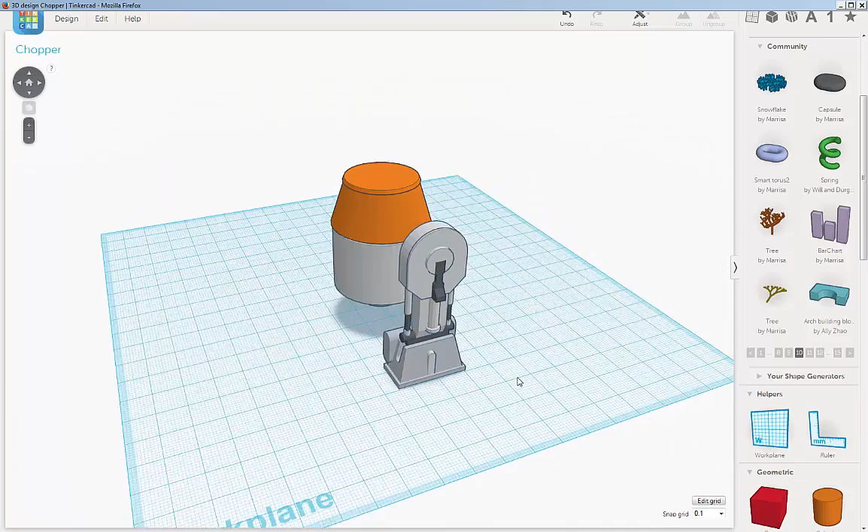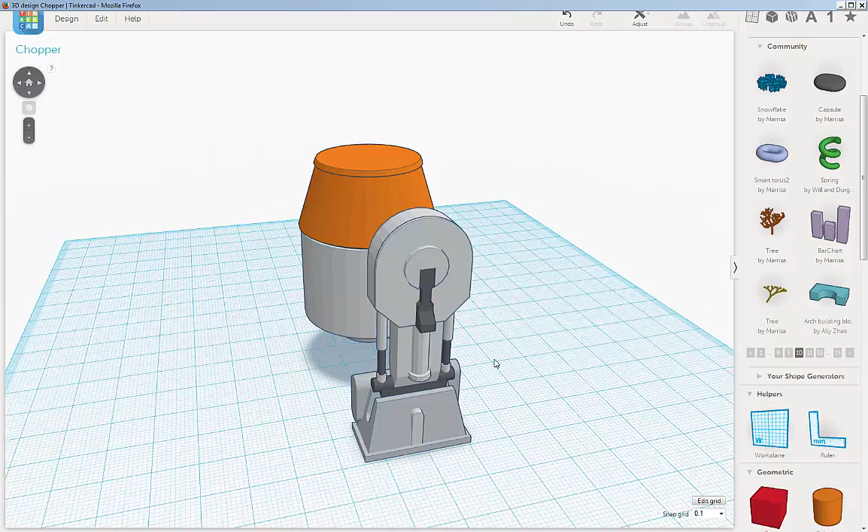Alright, so we're now going to move on to Chopper's left leg. It's pretty much the same, but the biggest difference is this part here. It's dark green and has a different shape. There are a few added detail bits that are a little different too, but we'll save ourselves a lot of time by copying and mirroring this over.

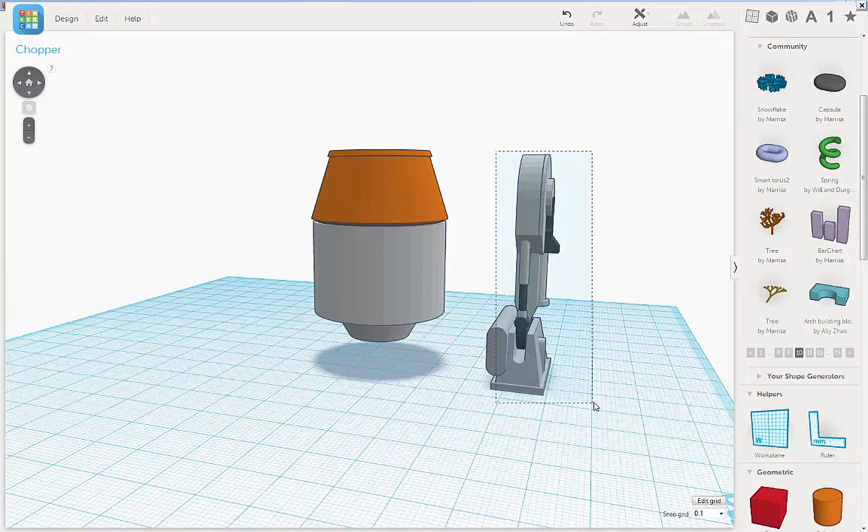So let's get started. I'm going to select this, marquee select, and group it for now. In order to keep the colors the way I like, I'll go under color and select multicolor.

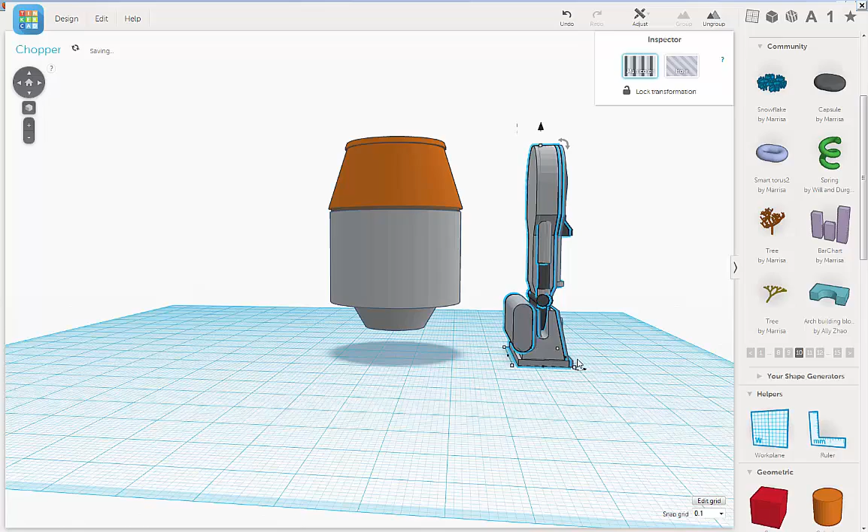Then I'm going to duplicate this under edit, duplicate, and now use the left arrow key to slide this over, which is taking way too long, so I'll use the shift button instead. Click off, push shift, then the left mouse button, then slide it over.

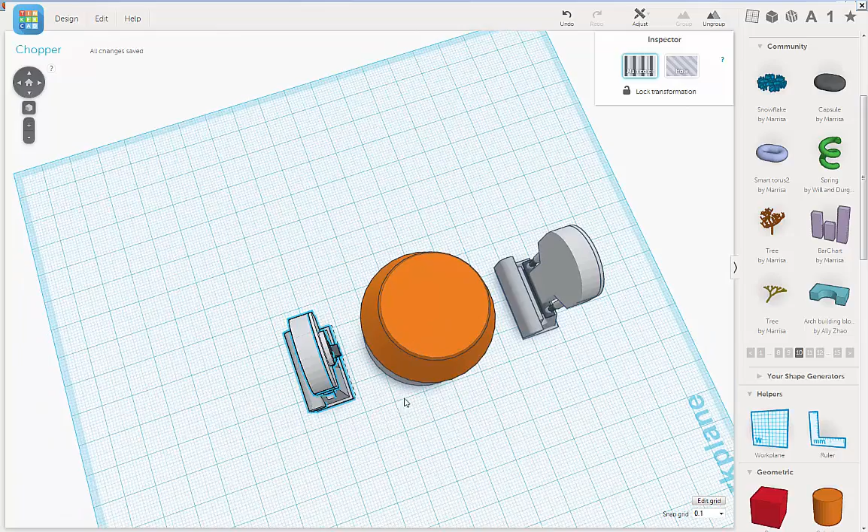Then I'm going to rotate it 180 degrees. It's getting close.

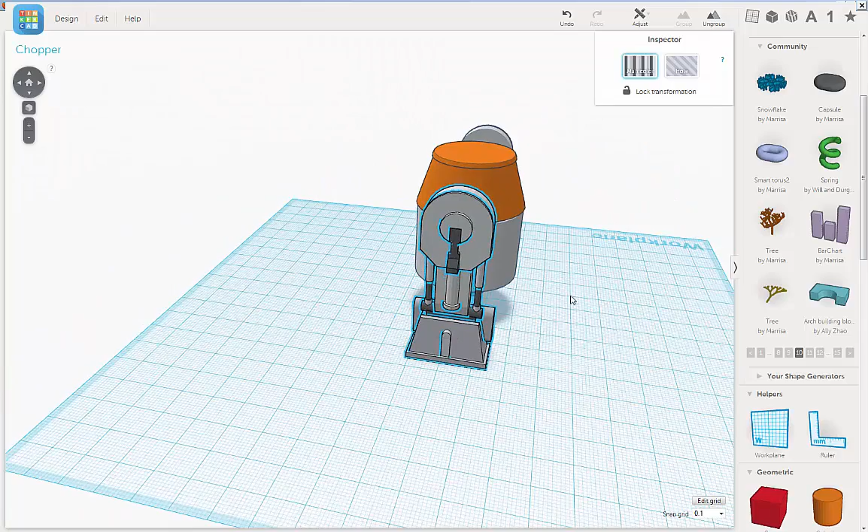So now, in order to make this left side, I'm going to do a little trick. I have this selected, and I'm going to ungroup that.

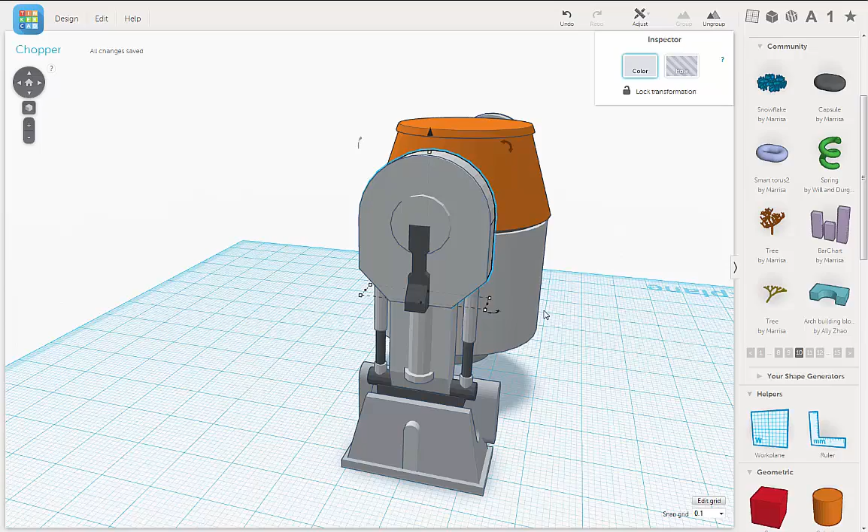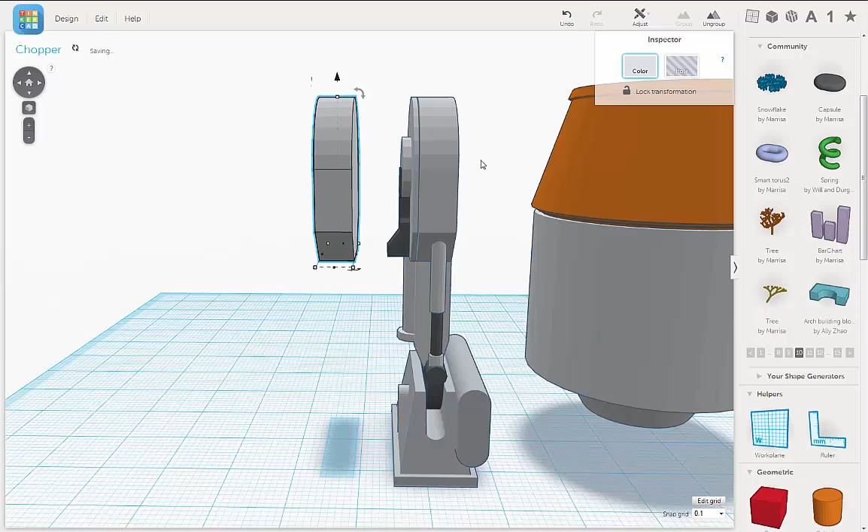I'm going to select this piece up here, and duplicate that. Edit, duplicate. In order to keep things aligned, I think I'm going to move it out and forward.

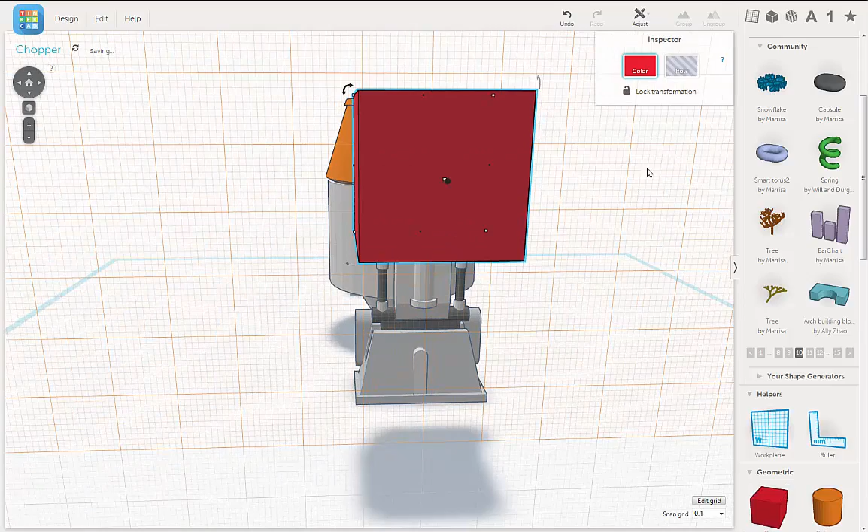Now I'm going to take the work plane, put it onto this face, and drag a cube out.

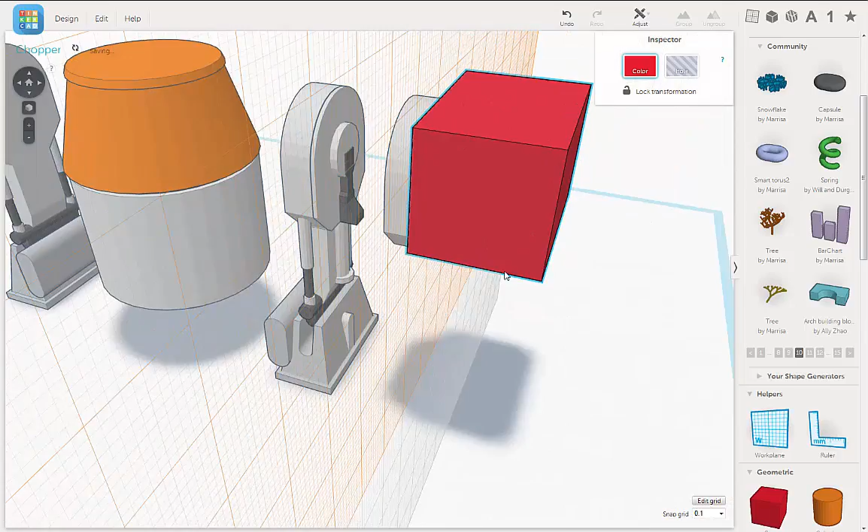I'm going to stretch it out. So grab this center point, drag it out, take the bottom point here, drag that out. Don't need it to be that thick.

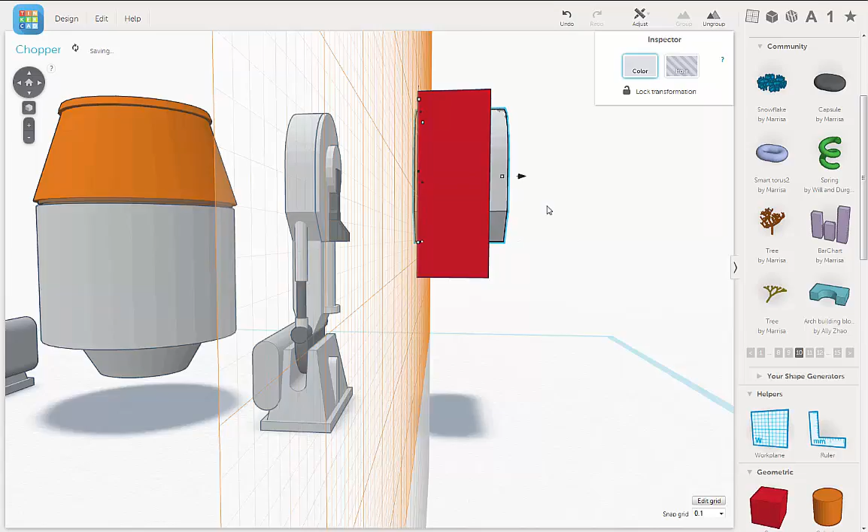Then I select this piece and drag it out. Select the cube and just move it up a little bit.

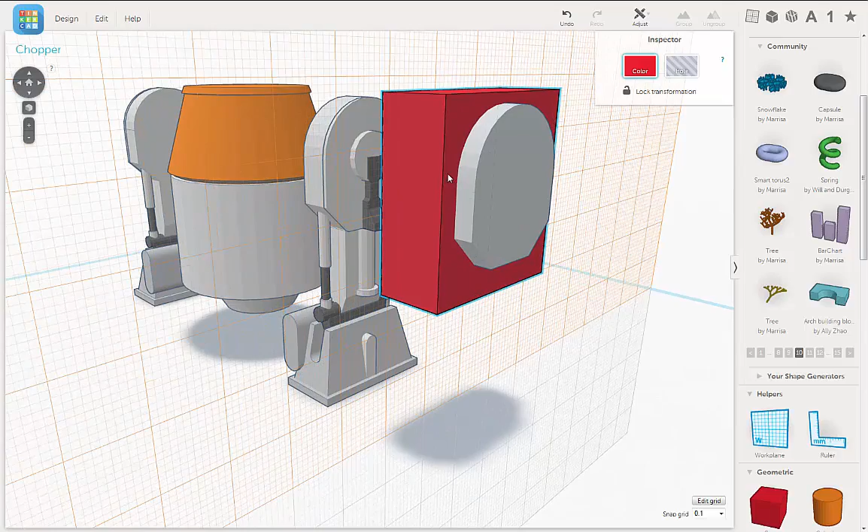So what I'm going to do is make a cookie cutter so I get this basic shape, so I turn this into a hole.

Shift select the cube and go group. So now I have this cookie cutter shape.

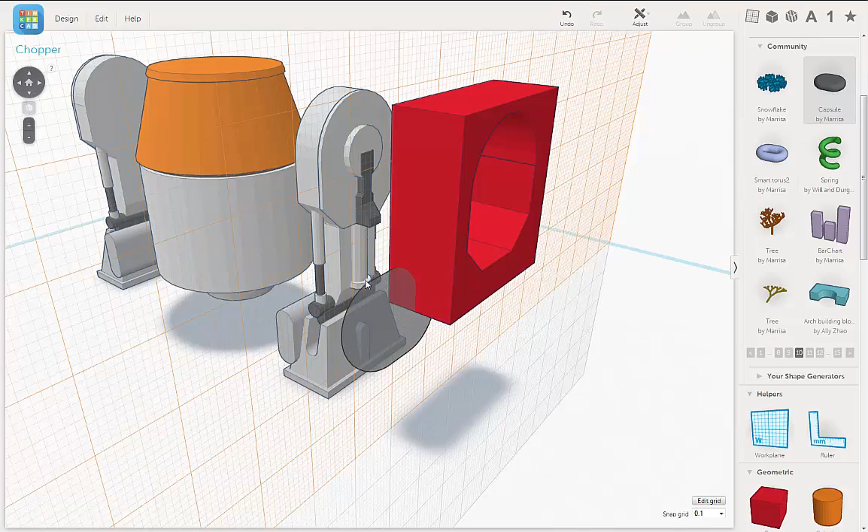Now, in order to get the curved edges of his left leg, we're going to use a Tinkercad community tool called the capsule. I'm going to drag that on and rotate it 90 degrees.

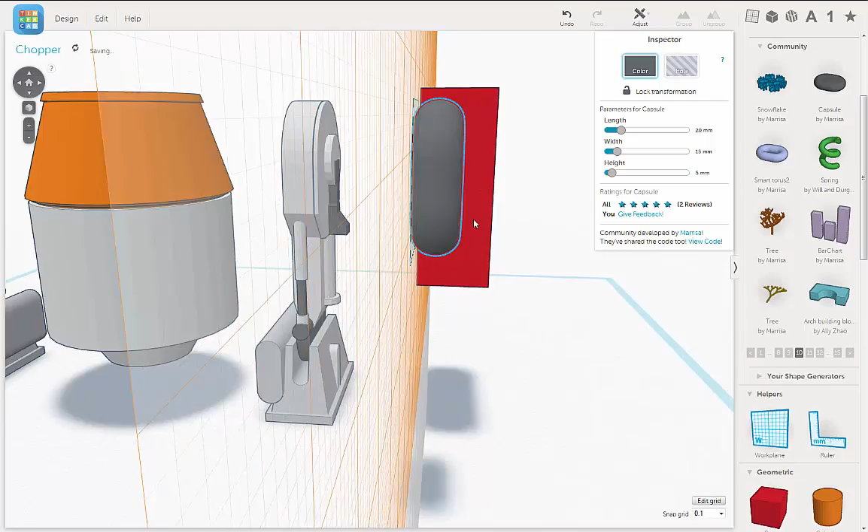I'm going to pull it up a little bit in width, like that. Now it's way too small.

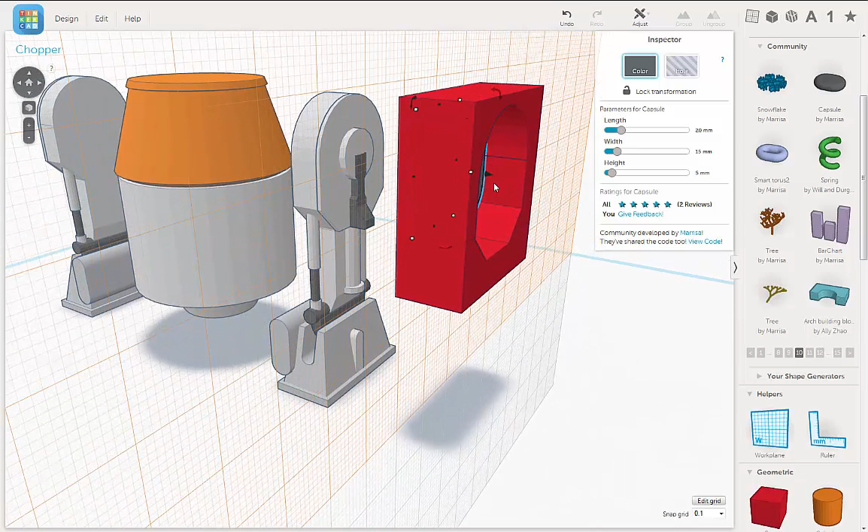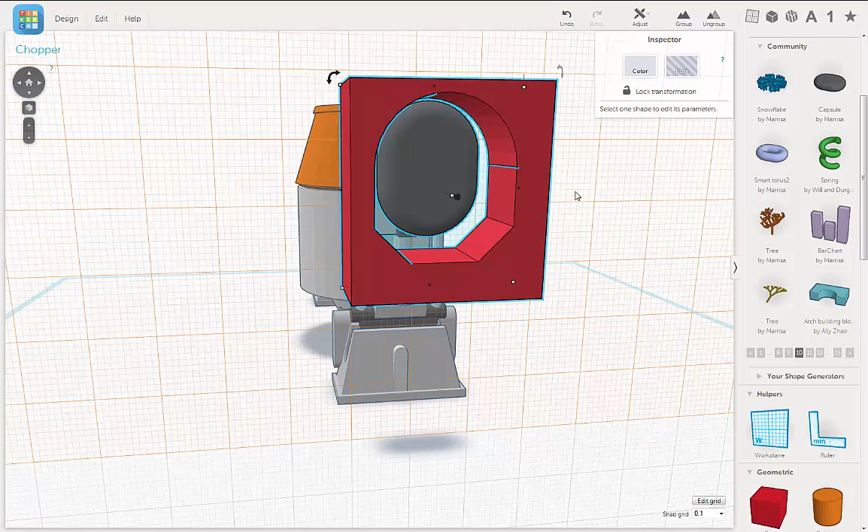So I'm going to align it. I don't want these things to move, so what I'll do is select the cube, select these pieces here, and then this piece, then this piece, and it'll only line up the one thing that's off, the rest are already aligned.

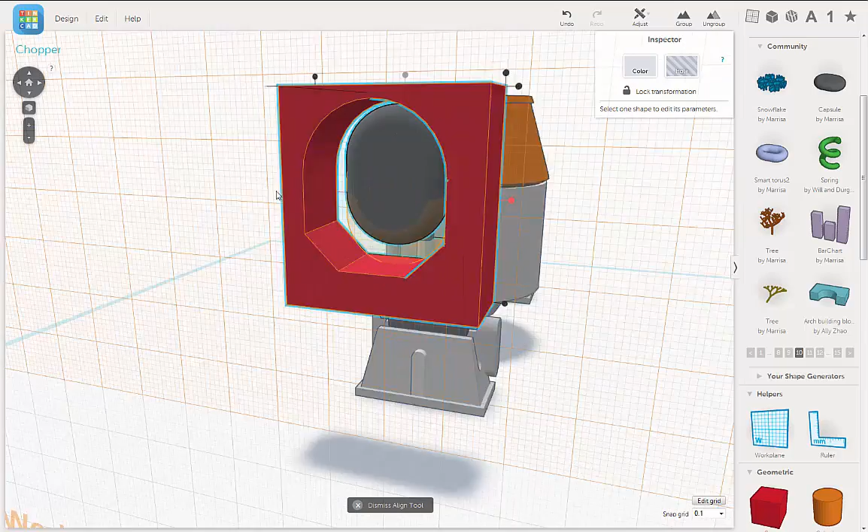Don't think that worked. Let's undo that. Actually, it might have worked. Let's just smooth this down and see if it lines up.

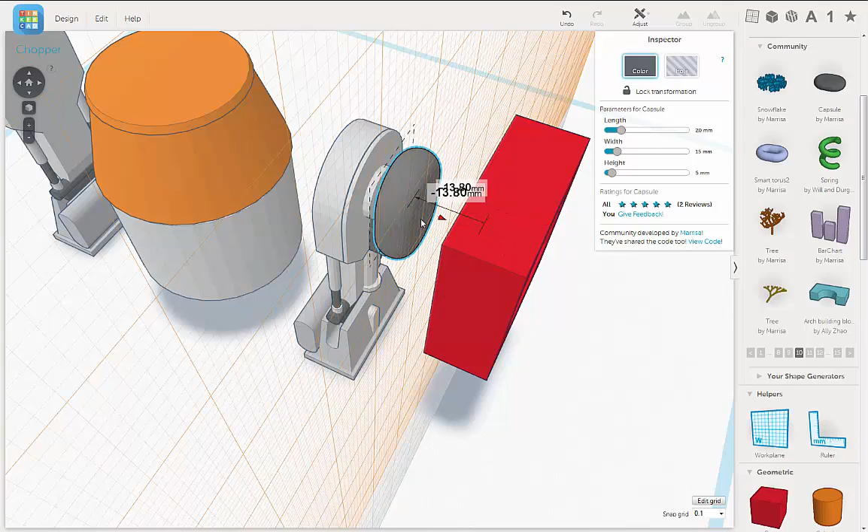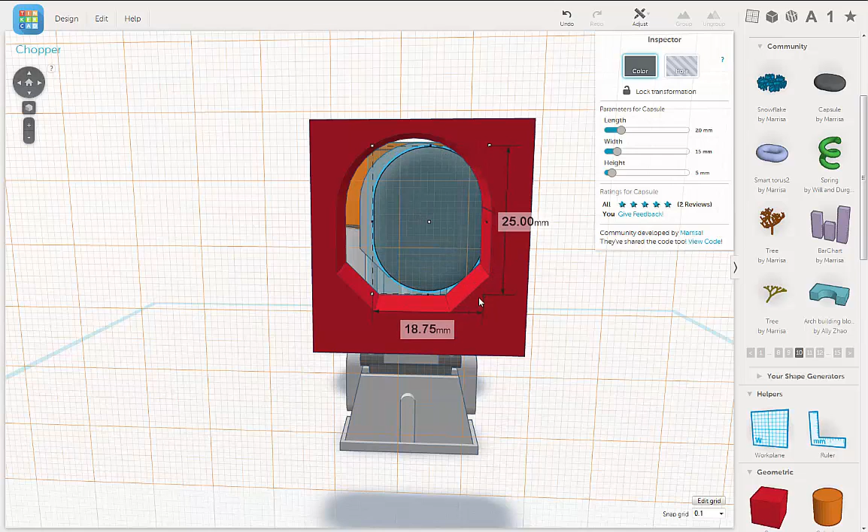Looks like it did. Right, so we're going to uniform scale, shift left mouse button. I want to make it a lot bigger.

And we'll do the same thing. We'll select, let's move this forward. Whoa. Undo.

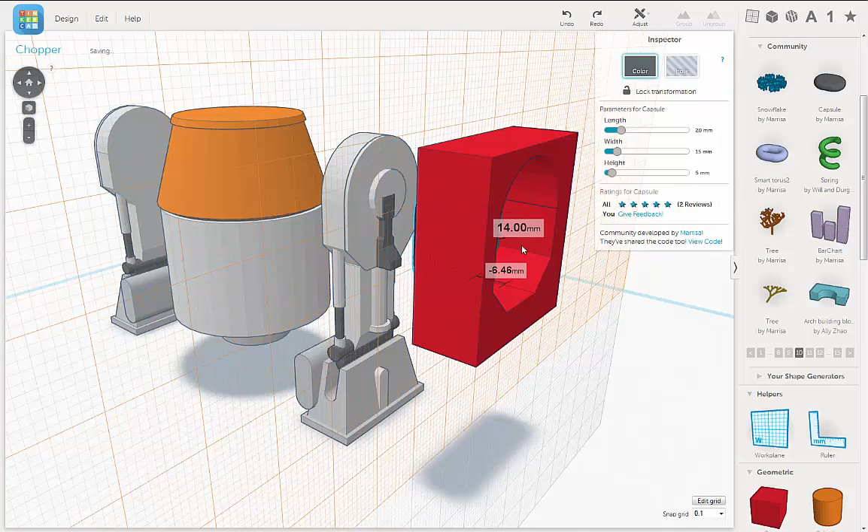Select this piece, move that forward. Select these pieces, and go to adjust, align. It's not working.

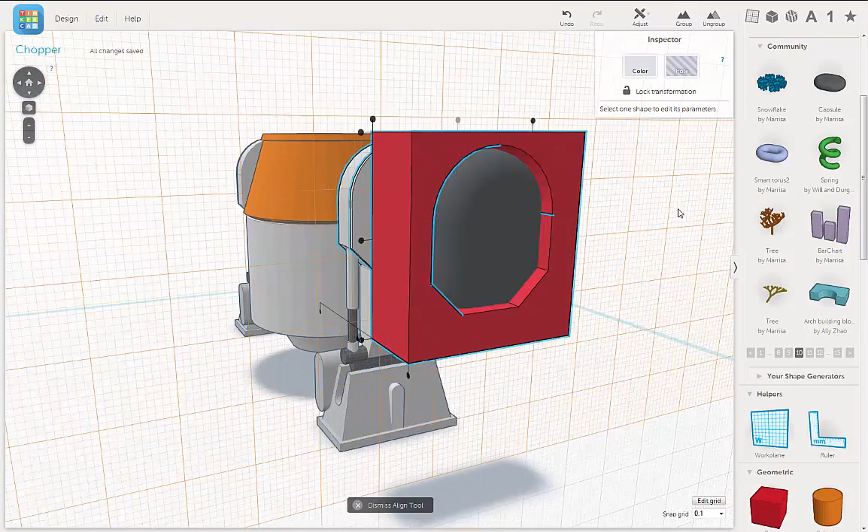So we'll try this, move it over to the left. I'm going to move it up.

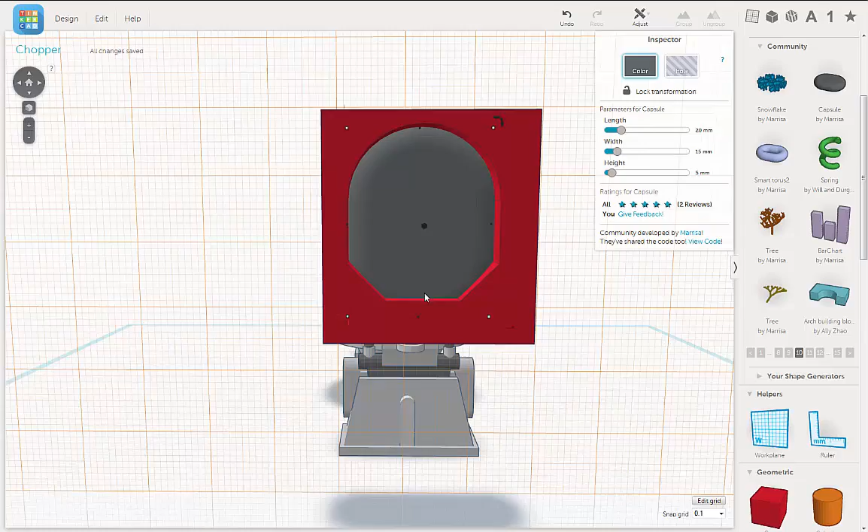So in order to see what this looks like in there, I'm going to turn that to a hole. It's looking pretty good.

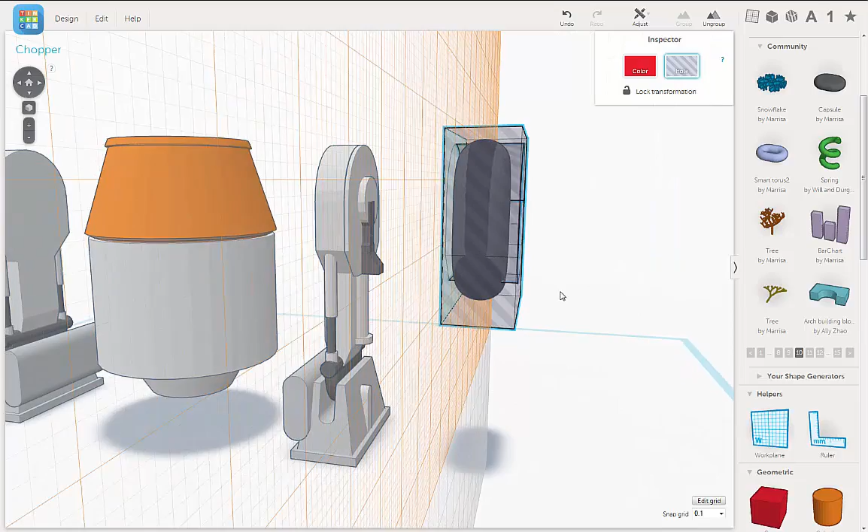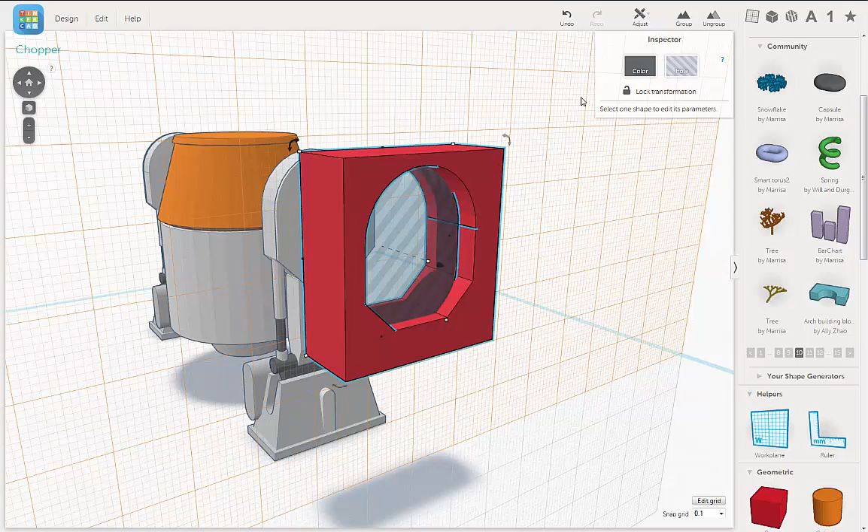So let's try this. Turn that back to color, turn this into the hole, and select the cube, the cookie cutter cutout, go group.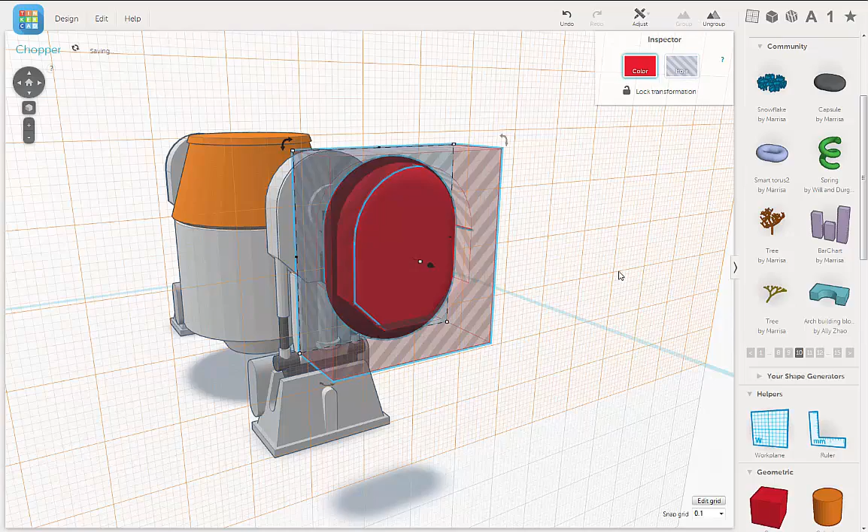Now select both pieces and go to group. Worked really well, actually.

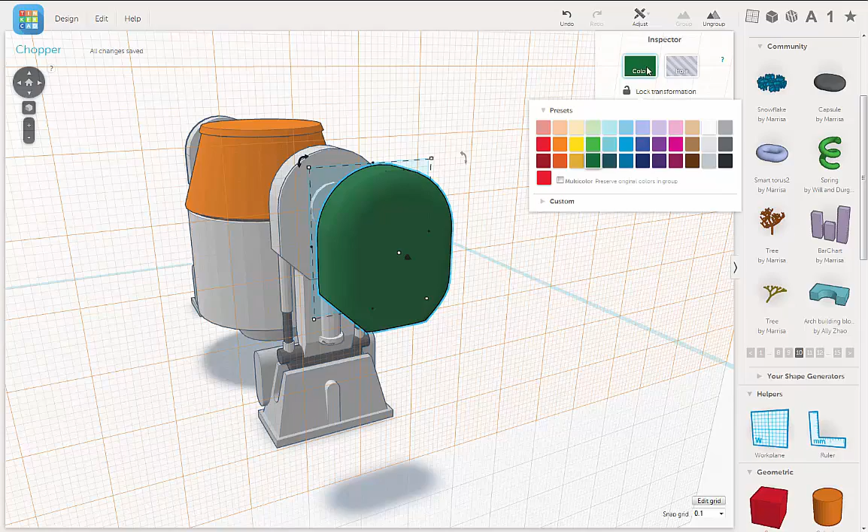I'm going to change the color, just like this drab green. You can do better than that. Yeah, that's more like it. Yeah, that worked really well.

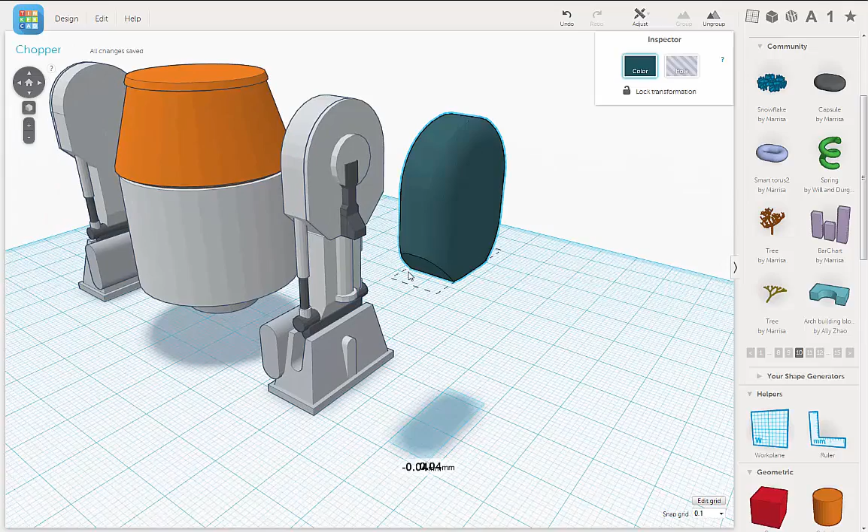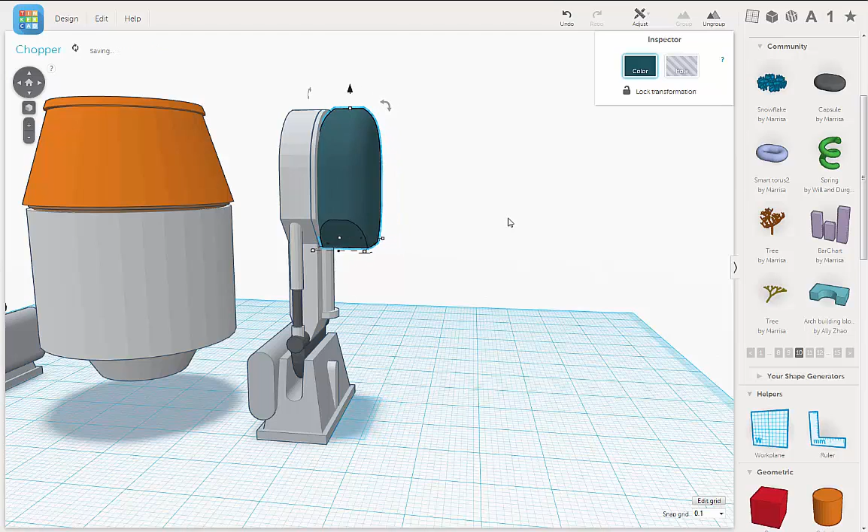So I'm going to move this back. I'm going to slide this over using the left arrow key. So I want to try and align this flat spot. It's a little off here.

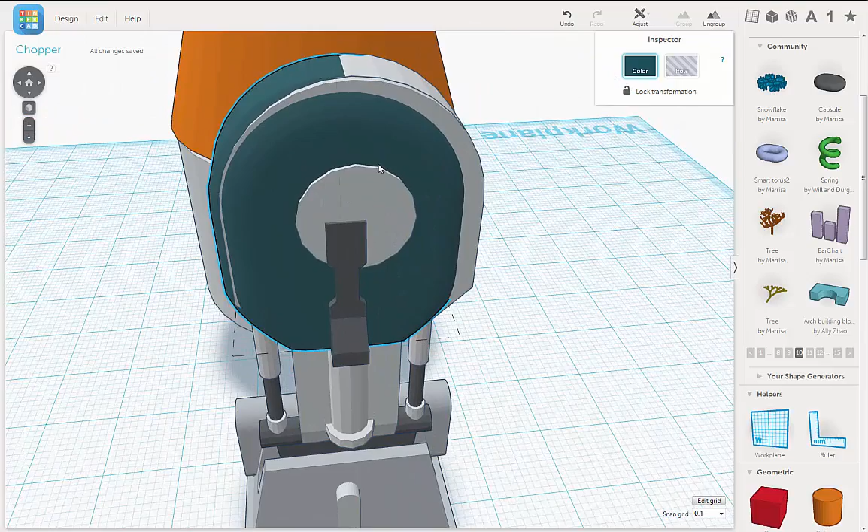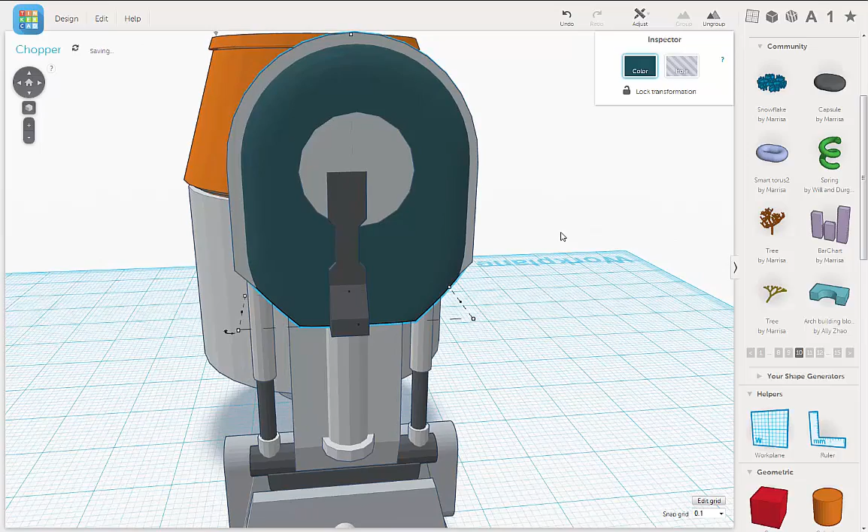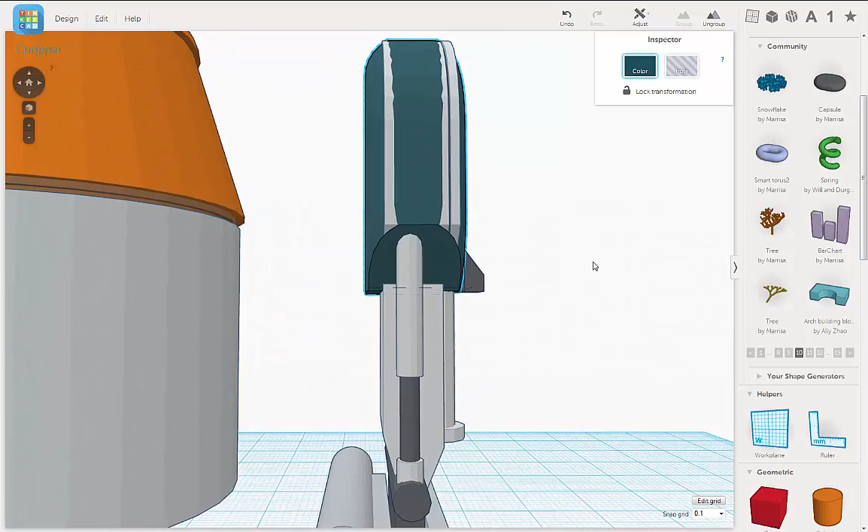There we go, almost there. Good. I'll move it back a bit.

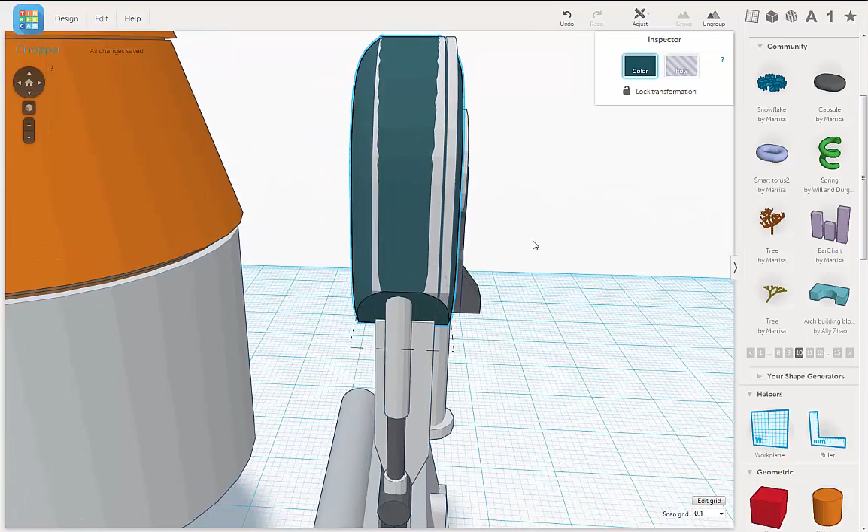We're going to cut it right along here. Not as exact as you can get with other types of modelers, but it's pretty good.

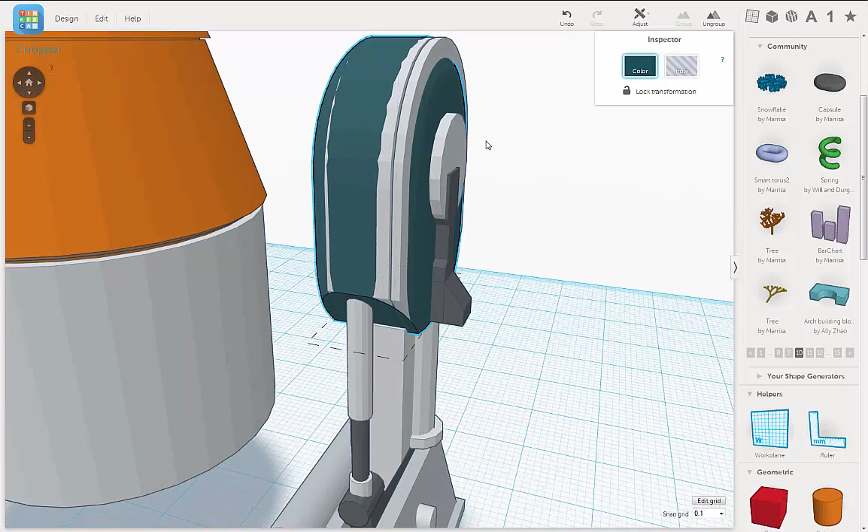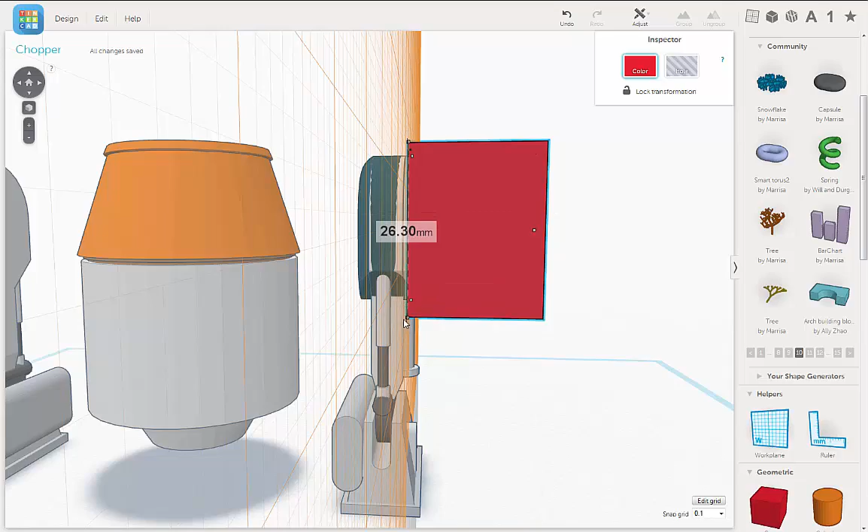So I'm going to drag a work plane onto this, drag a cube, and make it nice and big so it gets the entire tool.

Go to undo, get the arrow, slide it down.

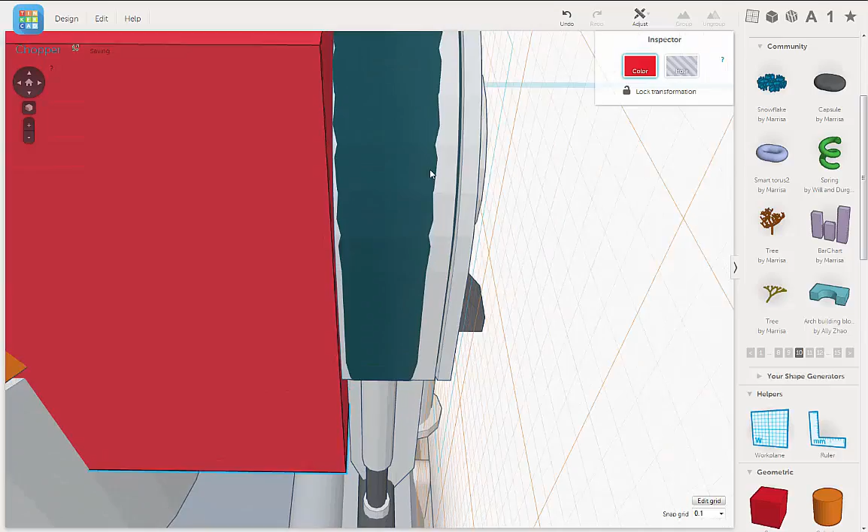Okay, turn that into a hole, and shift select the blue-green part of his arm and go group.

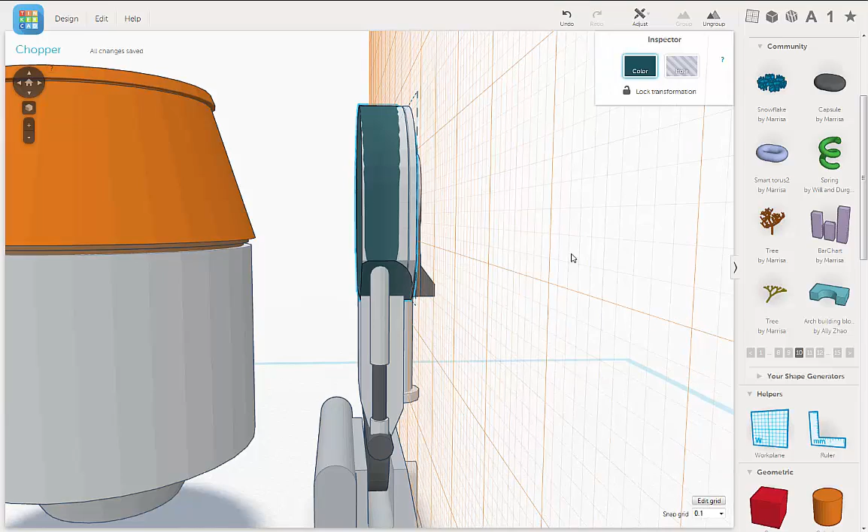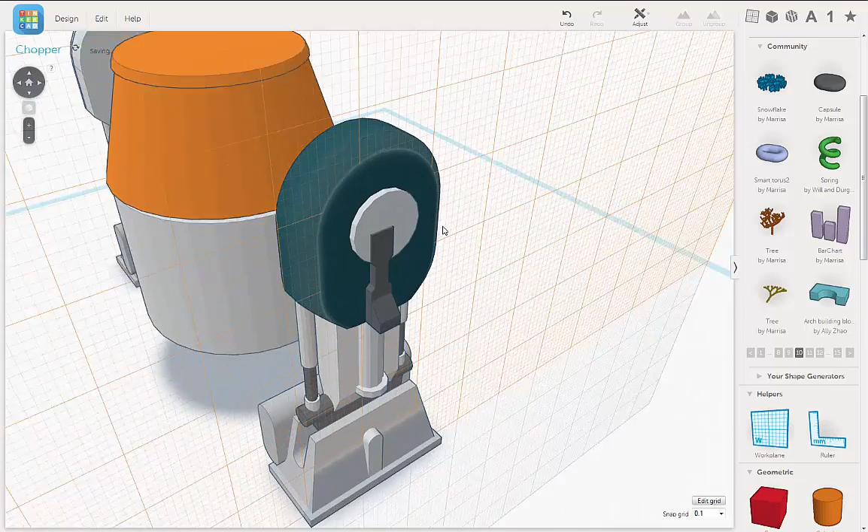Delete that part, and I'll send our work plane back here. There we go.

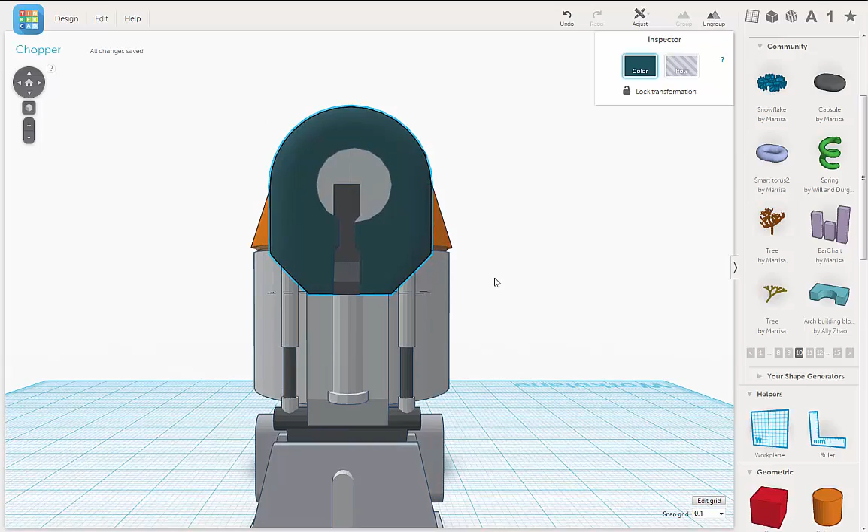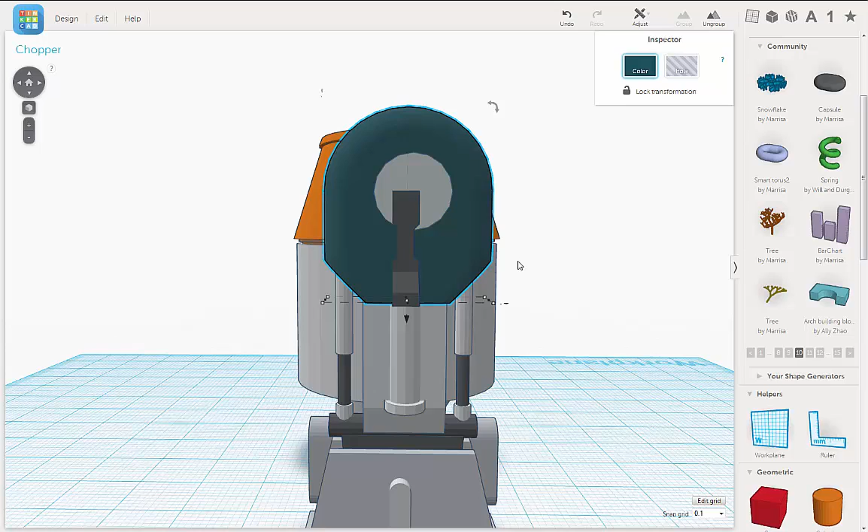Not too bad. This needs to be aligned a little better. Why, that's all misaligned. There we go, that's all aligned.

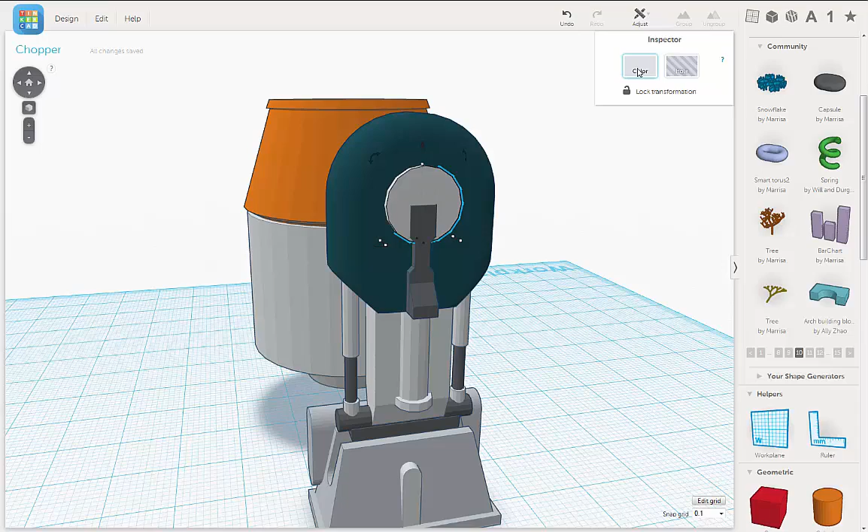Now we turn that to the same color. We're almost done. Alright, we'll start hitting details next.